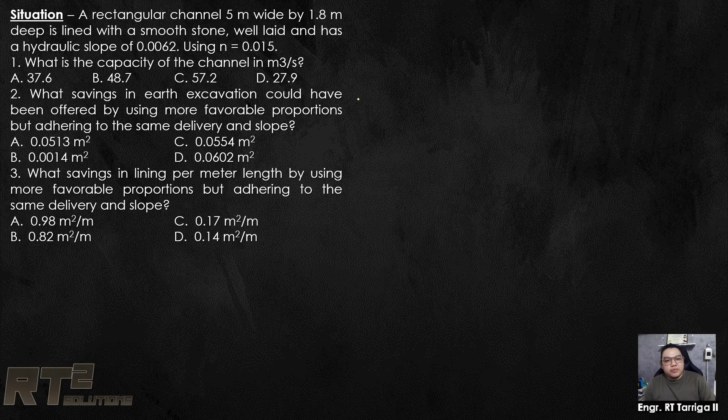Open channel. Rectangular channel 5 meter wide by 1.8 meter deep is lined with smooth stone, well laid, and has a hydraulic slope of 0.0062. Using N equals 0.015. For those who are not familiar with N, this is what we call Manning's coefficient.

Manning's coefficient, guys. It is one of the coefficients usually used in designing open channel structures. So it was said that it is a rectangular channel which is 5 meter wide by 1.8 meter deep, and it has a hydraulic slope.

Now, assuming this is a uniform flow, when you say uniform flow, the slope of the hydraulic grade line and the slope of the channel bed are the same. If they are equal - because there are problems with non-uniform flow, uniform flow versus non-uniform flow. This is the principle, class. So this would be the slope of the channel bed.

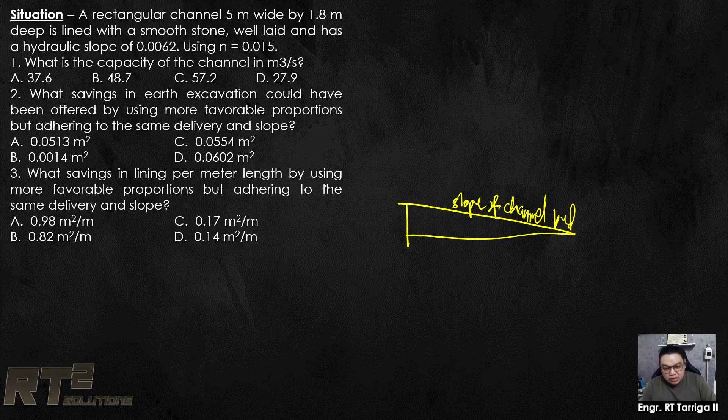Quick background on the principle: slope of channel bed. This is the depth here, and depth here at point 1, and this is also the depth here - depth of water. This would be the, not energy, hydraulic grade line, let's call it HGL.

If they are parallel, class, meaning it's uniform flow already. If there's something to exceed, you'd add a head, kinetic head, which is V squared over 2G, and here would be the energy grade line, if we call it that. Most likely, that's the principle.

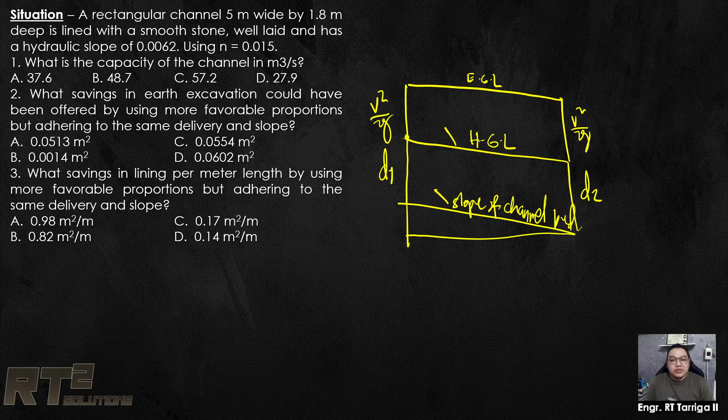So assuming this is a uniform flow, the slope of the hydraulic grade line is the same as the slope of the channel bed. That's how it looks. So this is what an open channel looks like - it is 5 meter wide, 1.8 meter deep, this is the water. Open channel - from the word itself, the top is open.

Now it is asked, what is the capacity of the channel in cubic meter per second? Well, that is just Q equals area times velocity. But we have velocity in terms of Manning's formula, Manning's coefficient. That would be 1 over N, R raised to 2/3, times slope raised to 1/2 - that's the formula when using Manning's coefficient, where R is called the hydraulic radius.

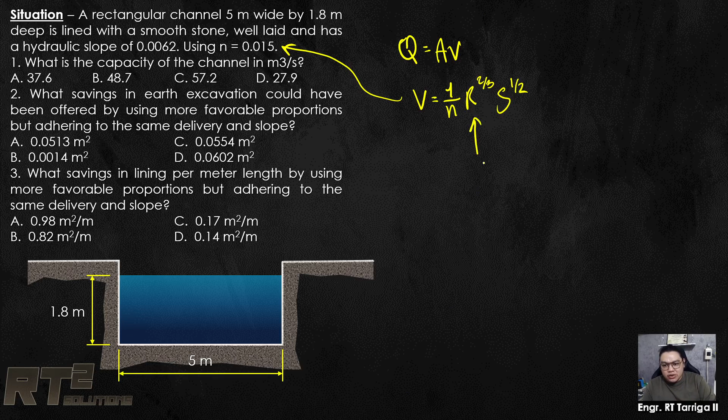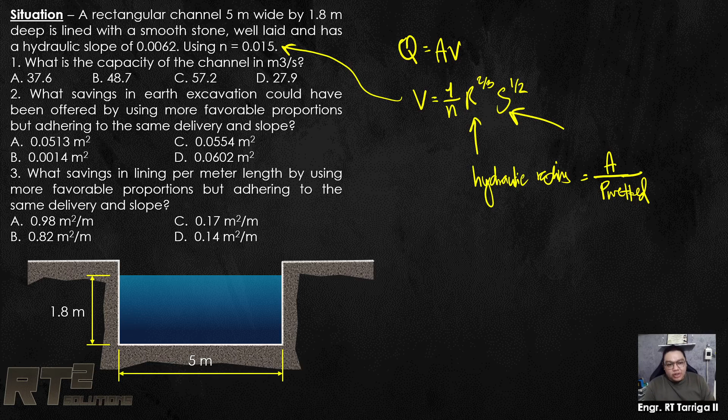Hydraulic radius. The formula, class, is area over the wetted perimeter - that's it, hydraulic radius. And S is the slope of the energy grade line, hydraulic grade line. Now if they are parallel, it's the slope of the channel bed. So this is the formula.

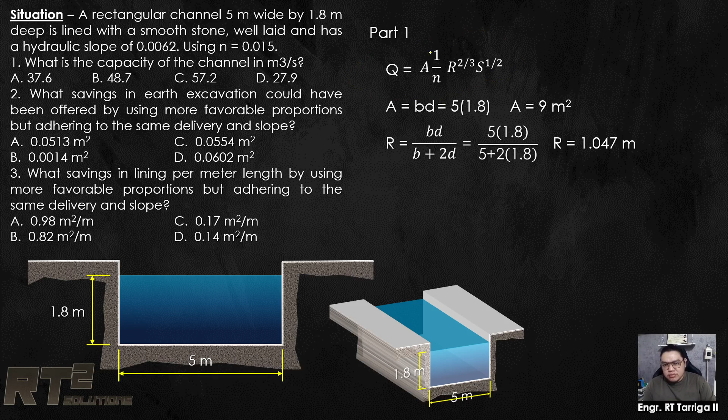Now we have the hydraulic radius and the area, so we can actually solve it. Let's solve using the formula. So Q is equal to... let's use the calculator so we're in sync.

Let's go together. Area, that would be 9, times 1 over the coefficient, 0.015, times hydraulic radius, 1.047 raised to 2/3, the slope is 0.0062 raised to 1/2, let's say 0.5.

The answer should be 48.71 cubic meters per second. You can see it there in the choices. That's the answer, the capacity of the channel, in cubic meters per second: 48.713.

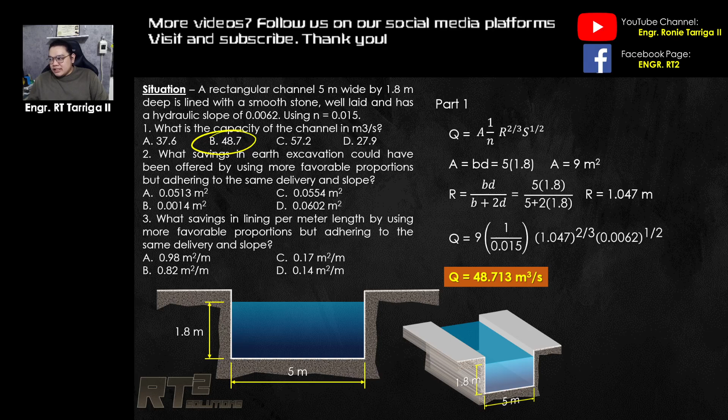Now that's the easy part. That's the easy part for this type of problem. For part 2 and part 3, these are the questions pertaining to the most efficient section.

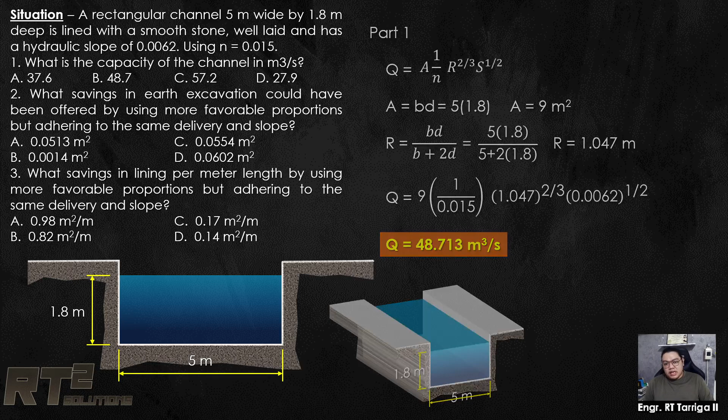Let's solve it. The question for number 2: what savings in earth excavation could have been offered by using a more favorable proportion but adhering to the same delivery and slope? So the delivery and slope should remain the same, meaning the discharge is the same.

The slope and the delivery don't change, meaning the discharge being released is the same. So we'll always use 48.7 for this problem. What we need to do now is know what the most efficient section is for a rectangular channel.

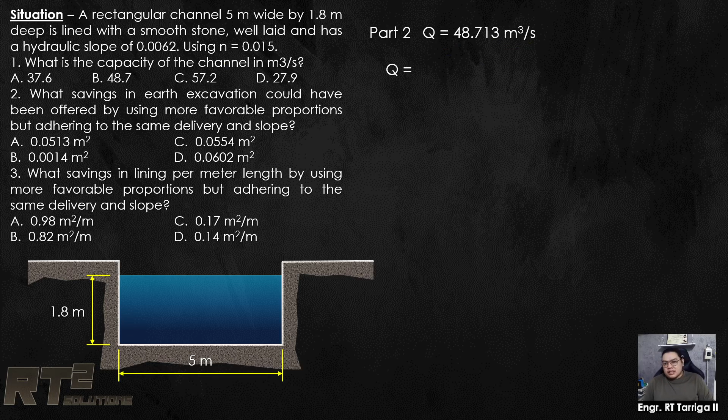There's a formula for that, class. Okay, here it is, we got it. For rectangular channels, the most efficient section is B is equal to twice the depth. That's it, class. Twice the depth is B. B is equal to 2D. So the hydraulic radius is D over 2.

We can actually derive that, class. Right, hydraulic radius is area over wetted perimeter. Let's see here. Area is B times D, over B plus 2D. Assuming B is 2D, since this is the most efficient section, let's substitute: 2D times D, all over 2D plus 2D.

Substitute. Actually, we can cancel this 2... no, it doesn't cancel, it becomes 4. So that would be D squared over 4D, or equivalently, cancel one D, giving D over 2. That's it, that's the shortcut for the hydraulic radius.

But what you need to remember, class, is that the most efficient section is this: B is equal to 2D. B is equal to 2D. This minimizes the area of the channel while still adhering to the same delivery of discharge and same slope. Okay, let's try to calculate.

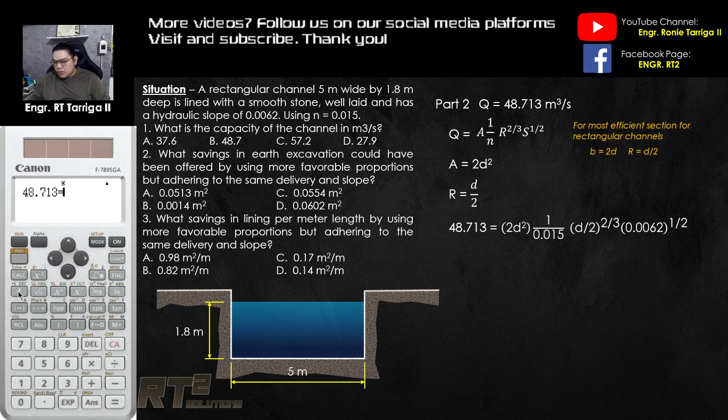Okay, let's solve for that. It should be 48.713 is equal to 2D, 2D squared, times 1 over N, N is 0.015, times hydraulic radius, D over 2, or on the calculator 0.5 of D raised to 2/3.

0.0062 raised to 1/2. Just do shift-solve, class. Just solve it, you're used to shift-solve already.

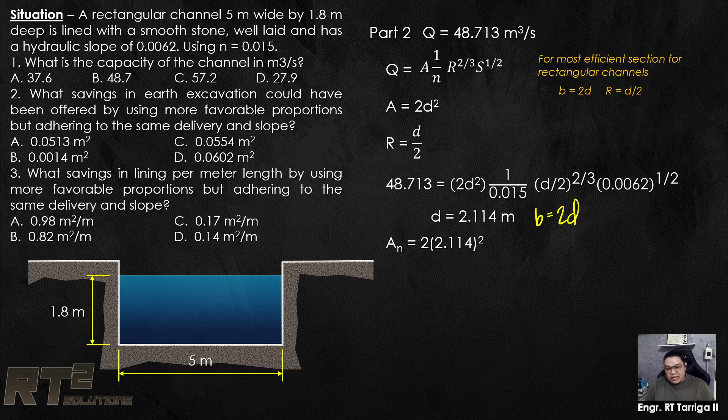So this would be 2 times 2.114. Tingnan natin sa calcu. Minsan hindi siya nag-i-exact, so sige lang, let's say 2x, kasi nakasave to sa x. 2x squared. O, 89.

8.941, medyo may discrepancy. Dito, 8.939. Dito sa calcu, 942. So may mga ganyang instances.

Now, our previous area is 9 meters. Saan ba yan galing? Actually, that is 5 times 1.8. Meaning yan, area old, that would be 1.8 times 5, equal to 9 square meter.

I-minus natin, savings siyempre 9 minus 8.939, that would be 0.061, diba? Medyo hindi siya i-exact, kasi sinave natin to. 5 minus ka na, 0.058. Diba, meron jud siyang mga discrepancy.

Tignang mabuti, so ang pinaka-close dito, siyempre, ito siya. 0.061, letter D. Okay, letter D.

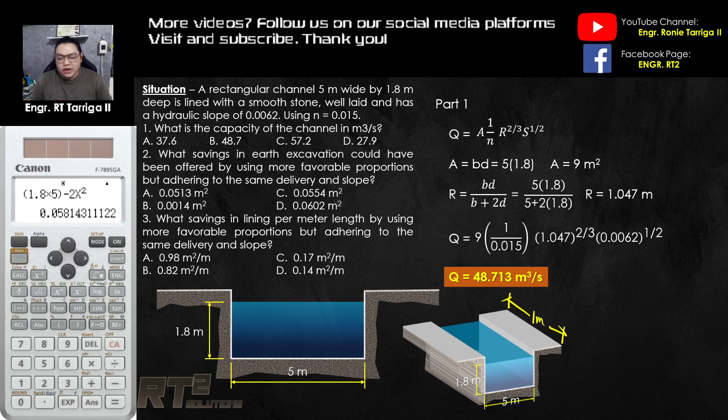Kumbaga ganito ba, saan ba yung drawing natin na 3D? Ito, we assumed na 1 meter to siya. Okay, 1 meter, so in every cubic, 1 meter perpendicular width or length. Yan yung gi-assume natin to.

This is for part 2. For part 3 naman, same scenario. Hindi na tayo mag-calculate pa ng D kasi automatic, ito na yung calculation natin sa D, abiding the most efficient section. Yan yun.

I-compare na lang natin ngayon since savings in lining per meter length. Actually, this is the perimeter. Perimeter siya, lining per meter length. Tingnan nyo, tingnan mabuti.

So part 3, ito yon. Solve na natin yan kanina, no need to go back, just change lang. Perimeter is 2D plus 2D.

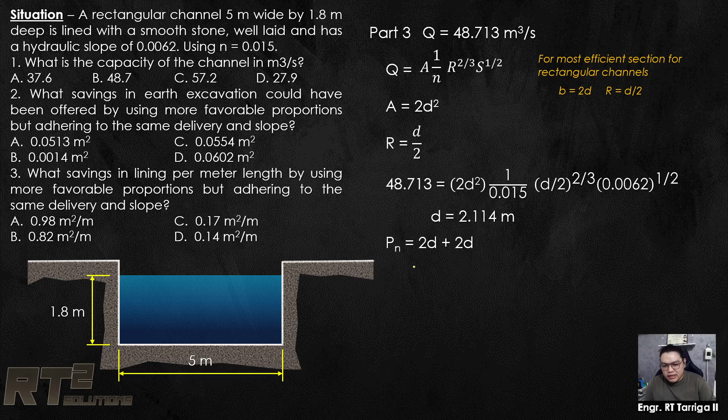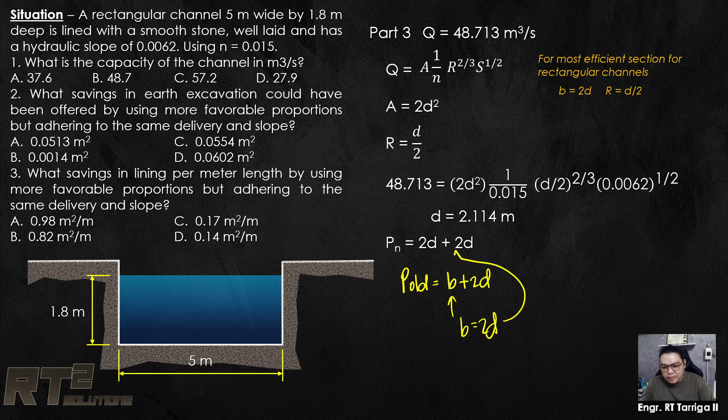Uy sir, paano nakuha yan? Ang old na perimeter, that would be B plus 2D. And we all know B is equal to 2D. That's why naging 2D plus 2D. Okay, that is for the new.

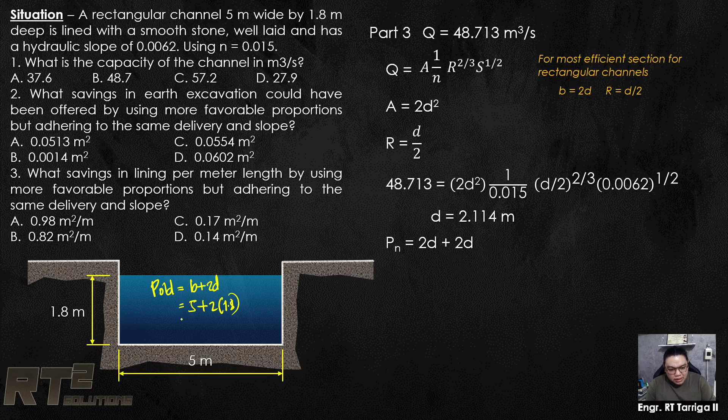Again, ang old perimeter dito, isulat natin, that would be B plus 2D. Solve natin, 5 plus dalawang 1.8. Pila na, old, calcu, that would be 5 plus 3.6, dalawang 1.8. 8.6 meters, okay?

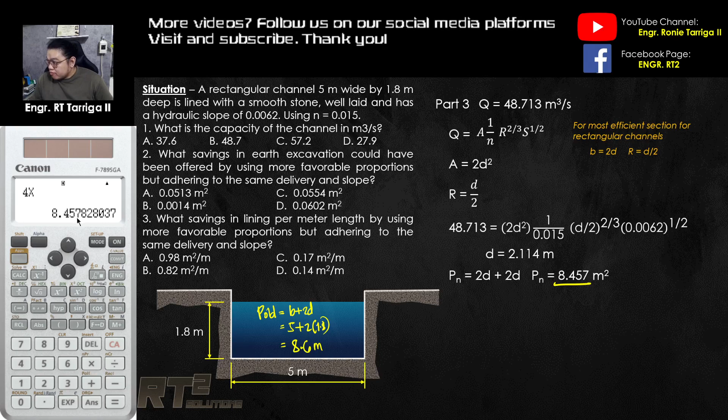Now, ito yung new, lumabas na 8.457. Tingnan, exact ba siya? Calcu, so pwede natin sabihin 4D, 4x, kasi sa calcu na-save natin sa x. 8.457, at least medyo malapit.

Medyo malapit, i-subtract dito sa 8.6. So sa savings, should be 8.6 old minus new. Subtract lang siya, then makuha natin 0.143.

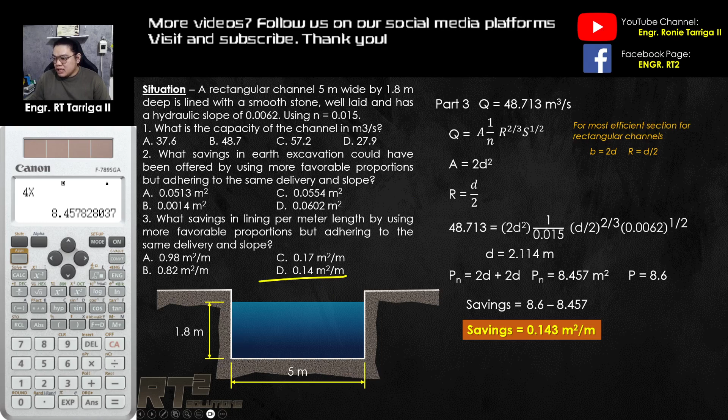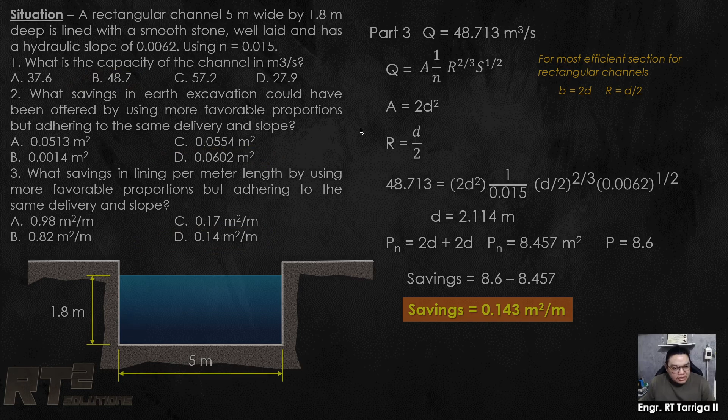Alright, so that's it for today's video. I hope na mayroon kayong natutunan. Actually, basic lang yun, pero we need to discuss pa rin, di ba? Basic is very powerful yun. Concept is everything, kumbaga nga may kasabihan.